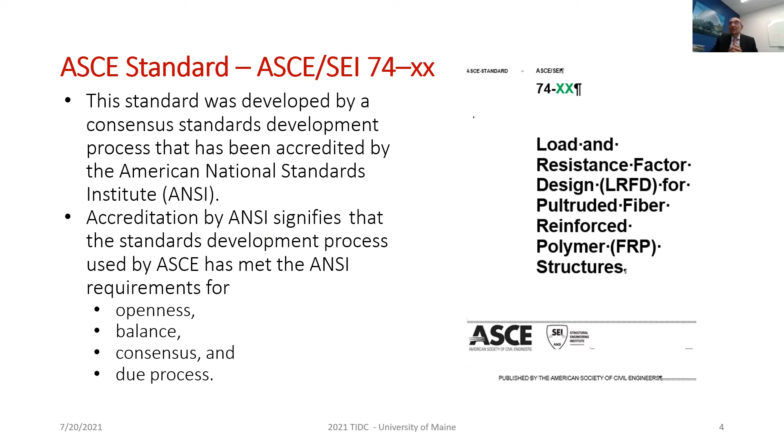There are challenges in the design of pultruded FRP composites due to the anisotropic or orthotropic nature of the material, which makes the job of design difficult but allows innovation. Creep and creep rupture of material is a characteristic of pultruded FRP composites, which is not present in many isotropic homogeneous materials such as steel or concrete.

When it comes to durability, although pultruded FRP is not susceptible to corrosion the way steel is, it does lose strength to some extent, and modulus, with exposure to different environments. This is essentially taken into account by looking at the retained properties.

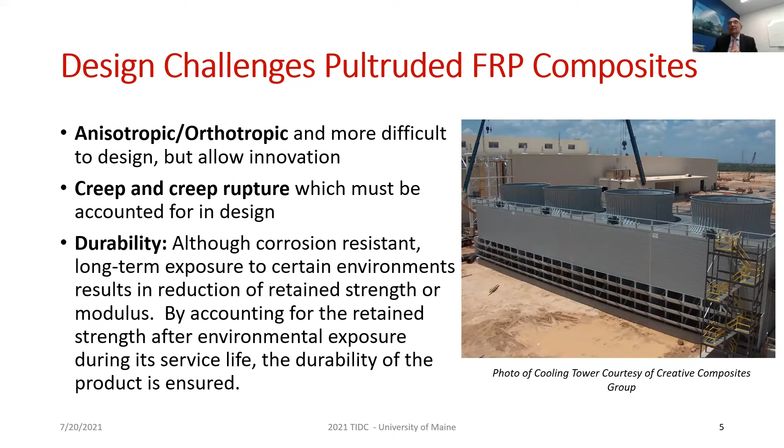The goal of the design is to use this material in new buildings, new bridges, and other structures constructed with pultruded FRP, assist in design of connections, as well as construction of prefabricated building components, industrial buildings, especially those subjected to very harsh corrosive environments such as seawater, and structures that can withstand earthquakes because this material has extremely high strength to weight ratio.

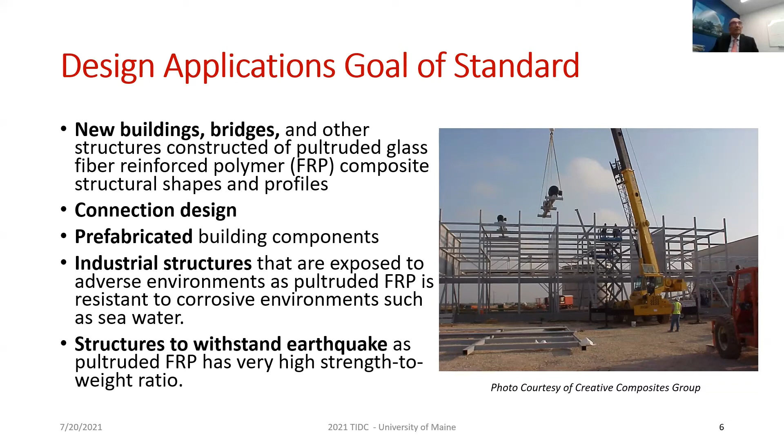The content of this standard includes 9 mandatory chapters with mandatory requirements and 9 chapters of commentary, which are not mandatory, plus 2 chapters, one on glossary and the other on symbols.

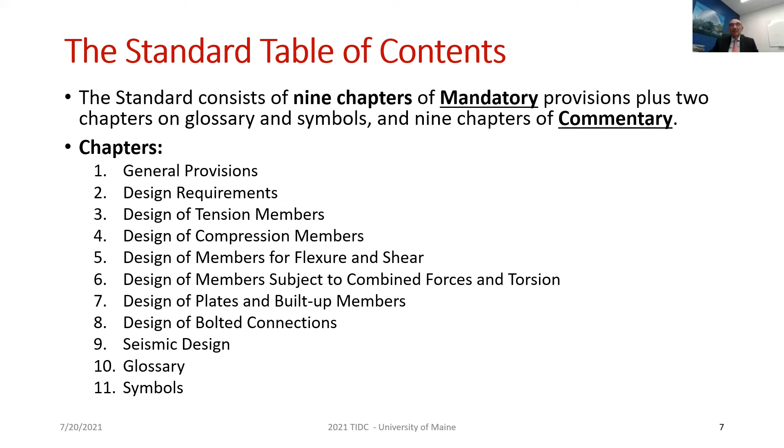The chapters cover general provisions, design requirements, as well as design of members for tension, compression, flexure, and shear, and combinations of forces and moments and torsion applied to individual members, as well as design of plates and built-up members and bolted connections. There is a chapter also devoted to seismic design, in addition to glossary and symbols chapters.

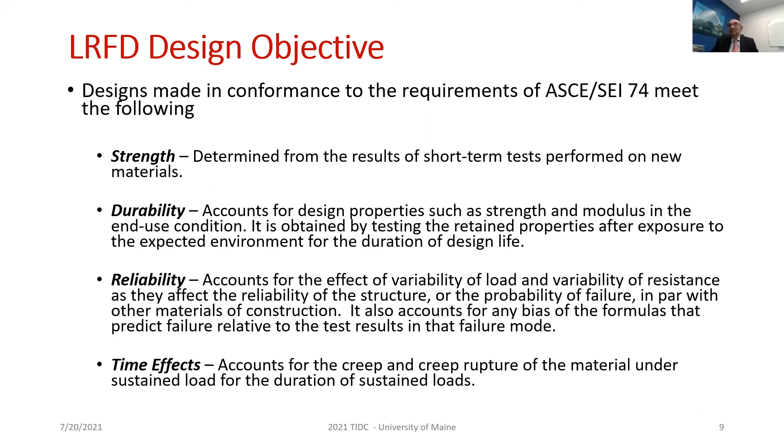What is the design philosophy of this standard? The goal was to develop a standard that, following it, would result in structures that provide the necessary strength, durability, and reliability on par with other materials of construction, and that account for time effects from creep and creep rupture of material under sustained loading.

Let's look at it in an equation. If R sub U is the required strength when the structure is subjected to factored load combinations, then this required strength should be less than or equal to the capacity. But how do we define the capacity?

The capacity is the product of three terms: one is the time effect factor that accounts for creep and creep rupture, the resistance factor that accounts for variability of resistance and bias, and the nominal strength in the end use condition.

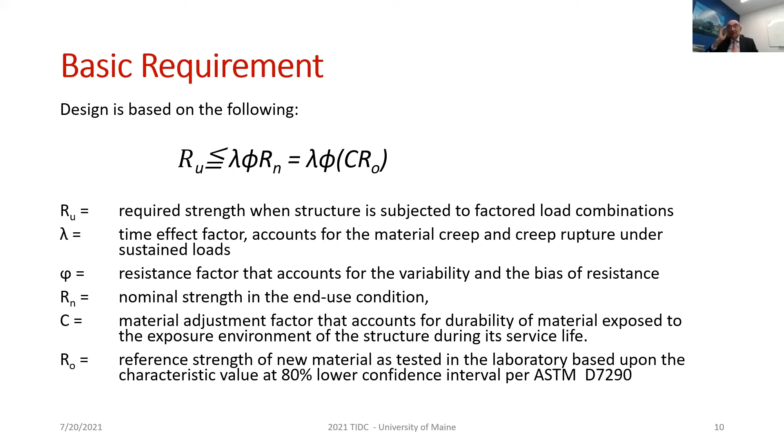If we consider the meaning of strength in the end use condition, we can express it as a reference strength, R sub naught, which is the strength of the new material as tested in the laboratory, and a coefficient, which is a knockdown factor or material adjustment factor, that accounts for the exposure environment the structure is subjected to during its service life.

Let's look at each component. Loads, load factors, and load combinations - where do they come from? These are essentially the same regardless of material of construction, and they are specified in ASCE 7, the document entitled Minimum Design Loads and Associated Criteria for Buildings and Other Structures.

Many different load combinations are given, with load factors associated with each load and each load combination. For example, dead load and live load on a building are treated with load factors of 1.2 for dead load and 1.6 for live load. These factors and loads are the same regardless of the material of construction.

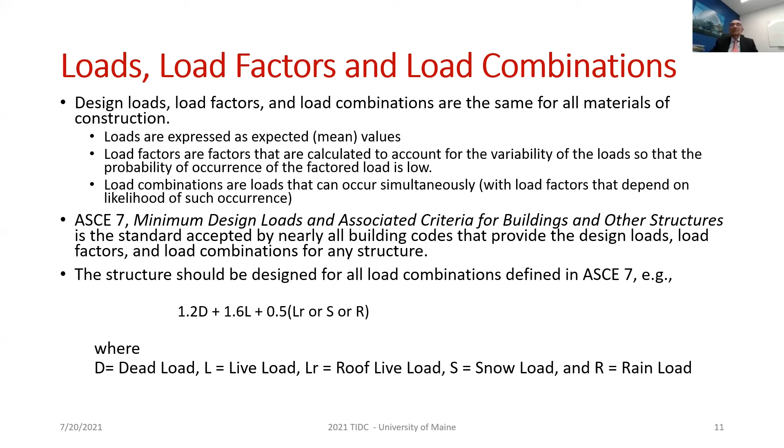Strength is defined with reference strength, which is new material as tested in the laboratory following ASTM standards. But what do we do with the test results once we obtain them? Here is what we rely on: an ASTM standard that says we look at the reference strength as the 5th percentile value of the test results with 80% confidence.

Confidence has to do with the size of the sample being tested. Once you have the reference strength, the nominal strength is the strength in the end-use condition. As I said before, it's the product of the material adjustment factor that accounts for durability and the reference strength.

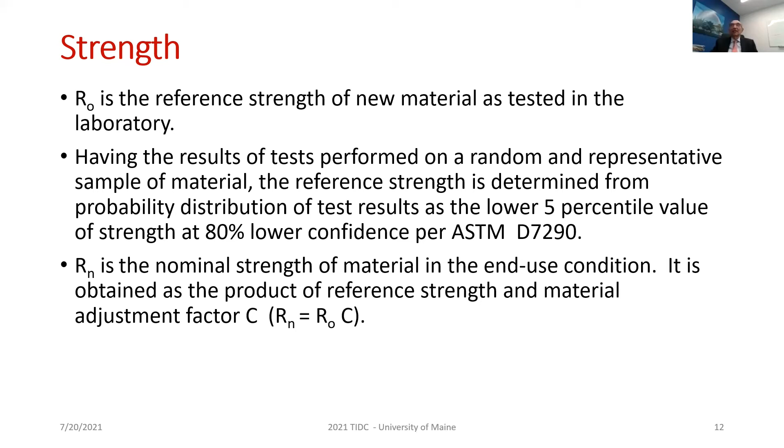How do we get the material adjustment factor, which is the basis of durability? We expose the material to different environments for a long period of time, between 1,000 and 10,000 hours. After exposure, we measure properties such as strength or modulus, take the mean of that, and compare it with the mean of the new material that has not been exposed. Then we extrapolate the results to the expected life of the structure.

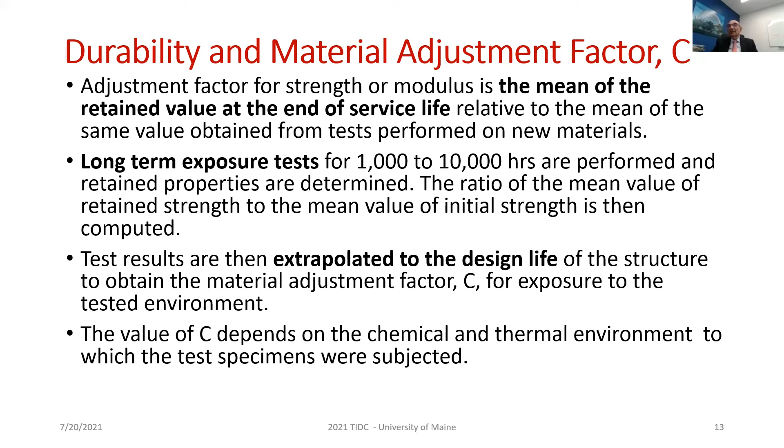This way we establish the factor C, from which the nominal strength is calculated using the reference strength. The standard provides for two exposures: moisture and temperature, with values that vary for strength and modulus, and also vary with the type of resin. In the case of temperature, it also varies with the level of temperature. These values, if you have both moisture and temperature, have to be multiplied together to establish the material adjustment factor for a product exposed to both.

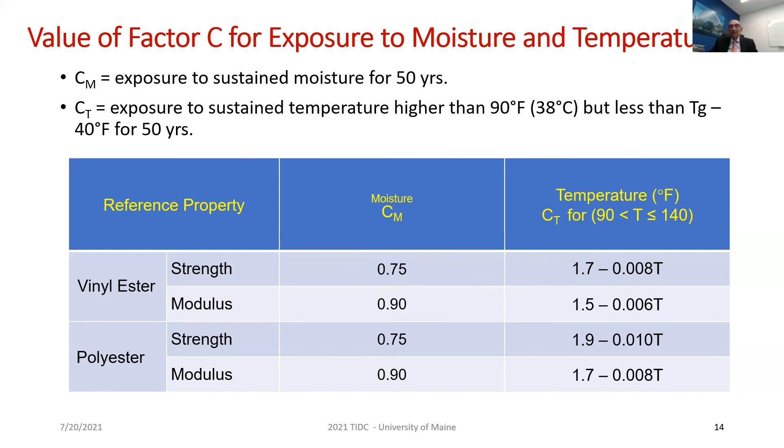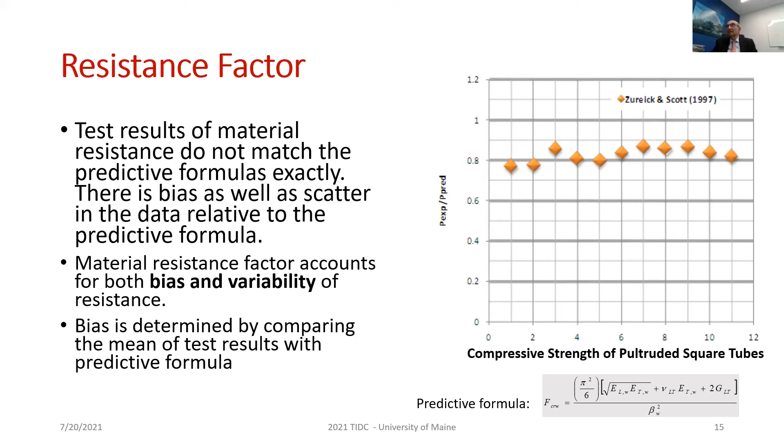Resistance factor is another factor that we talked about, and it comes into the capacity. The resistance factor accounts for bias and variability of resistance. What is bias? I present to you the compressive strength of pultruded square tubes, and you will see that using the best equation that money can buy, still the test results coalesce around 80% of the predicted value.

Therefore, there is a bias of 0.8 that has to be accounted for. And what about variability? Variability goes back to probability of failure or probability of survival. How many standard deviations do we have to go below the mean in order to have the reliability, or probability of failure, which we desire the structure to have? That number is called the reliability index.

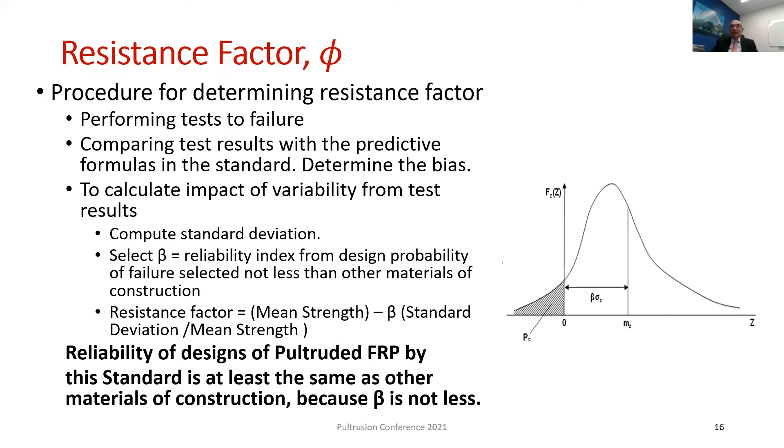Two structures made of completely different materials, so long as they have the same reliability index, have the same performance and the same reliability. This is the basis why we can claim that structures designed in accordance with this standard are, from a standpoint of reliability, on par with other materials of construction, because we selected the reliability index very similar to those used in other materials of construction.

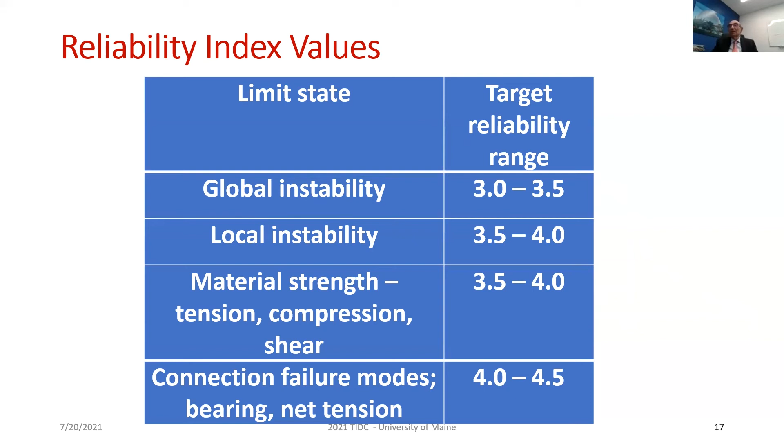It's variable. For example, general instability is between 3 and 3.5. As you get to local instability, which you don't want to occur at the same time as general instability, you put it further away, at 3.5 to 4, until something you don't want to fail at all, such as a connection, which you assign a higher reliability index.

Time effect factor is done essentially by subjecting the member, component, or structure to a load which is less than its strength and measuring time to failure. Then we extrapolate the results to the design life of the structure, and based on that, we get a factor, a knockdown factor on strength.

For example, for permanent load using pultruded FRP, you have a factor of 0.4 reduction due to permanent load effect. However, since load combinations combine different loads, some may be instantaneous like wind and earthquake, some may be permanent like dead load, and some may be in between like live load.

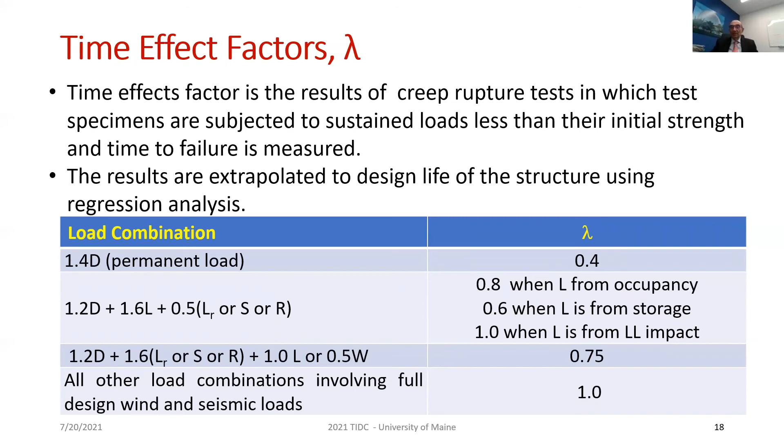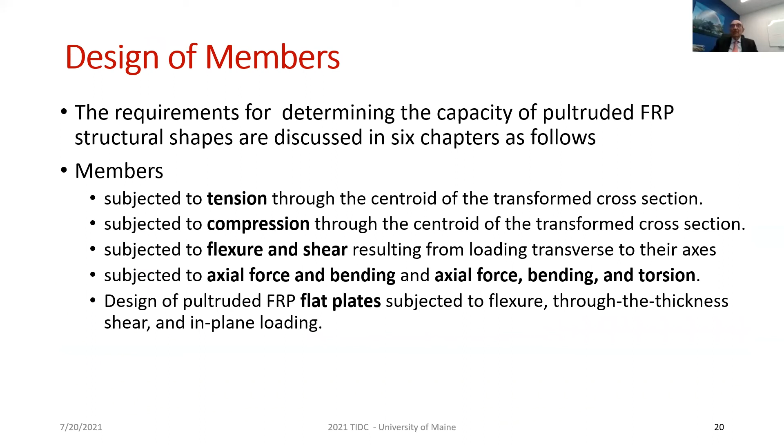These combinations have a much higher time effect factor, as you see in this table, which is an extraction from the standard. Design of the members: there are chapters devoted to design of members in tension, compression, flexure, shear, axial force and bending, axial force bending and torsion, and flat plates. We will not go through all of them, but I'll take one as an example, and that's compression members.

In the case of compression members, we look at different modes of failure. For example, rupture of the member in compression, general buckling of the member - here the issue of imperfection comes into play - and local buckling of the flanges and webs and slenderness ratio. All of these are sensitive subjects that influence the strength and are well discussed in this chapter.

Each one of these failure modes is associated with equations that manifest the behavior of a member, and there are different shapes and different members, so you can imagine this can be quite an extensive chapter.

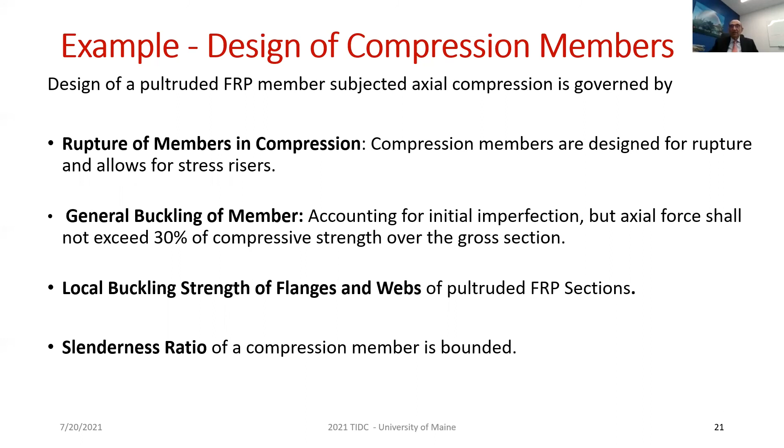Design of connection is an important chapter. We look at a single bolt and what are the failure modes of a single bolt, and then we generate the capacity by looking at all possible modes and selecting the one that governs, or with the least amount of capacity.

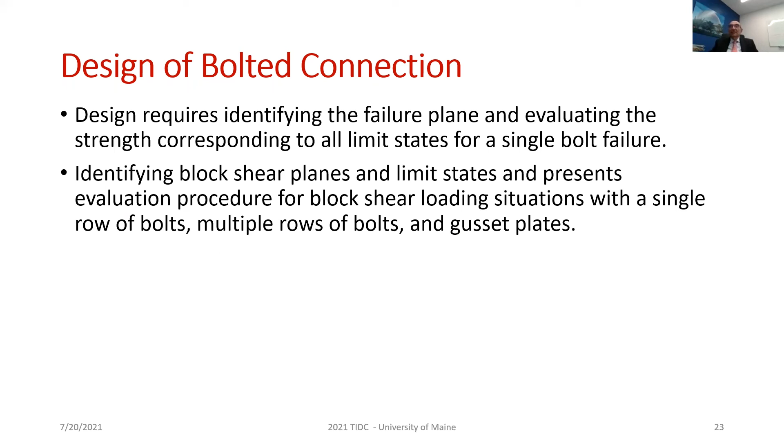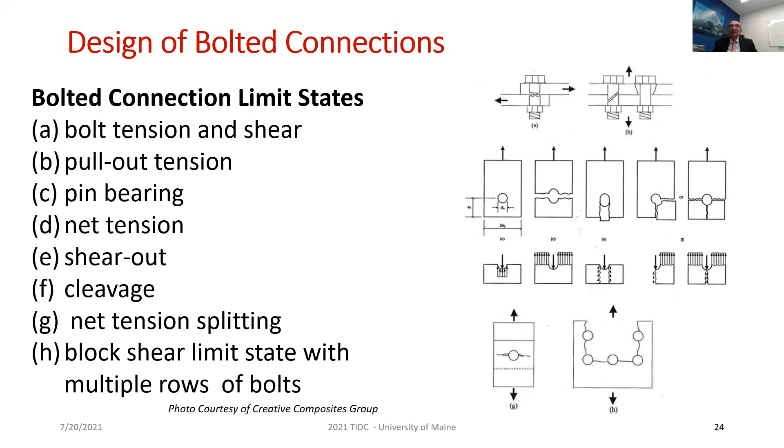The single bolt connection can fail in pull-out tension, pin bearing, net tension, shear out, and cleavage and net tension splitting, which are depicted in the figure on the right-hand side, as well as, if there are multiple bolts, you get block shear, which requires you to prescribe the failure perimeter or failure mode, and based on that, you can calculate the strength associated with it.

Seismic design: it was necessary to develop a chapter on seismic design. One reason was for completeness, and the second is that the product has a very fantastic high strength to weight ratio, and it's ideal for application to

excitations from ground motion. The earthquake load is defined in the same way as for any other structure, in accordance with the requirements of ASCE 7. The standard also meets general structural integrity provisions of ASCE 7 when you design pultruded in accordance with the requirements of this chapter. To resist lateral seismic loads, pultruded FRPs are required to have braces at this time.

Maybe in the future, with enough testing, other connections may become acceptable, but at this time, for the confidence we want designers to have, we require that any lateral resistance is provided by bracing. We are providing initial seismic design parameters, but these parameters are subject to change in the future as testing progresses, and these seismic parameters have to go into building codes and other standards.

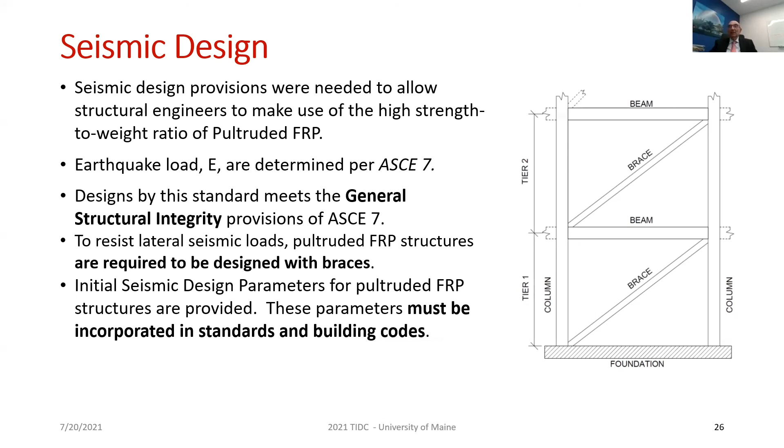In conclusion, I can say that this new standard will enable structural engineers and architects to create and safely design new buildings, new bridges, prefabricated components, and structural systems, and artworks that are easy to construct and have high strength and lightweight, and can resist adverse environments, and are not subject to corrosion as other structural materials are.

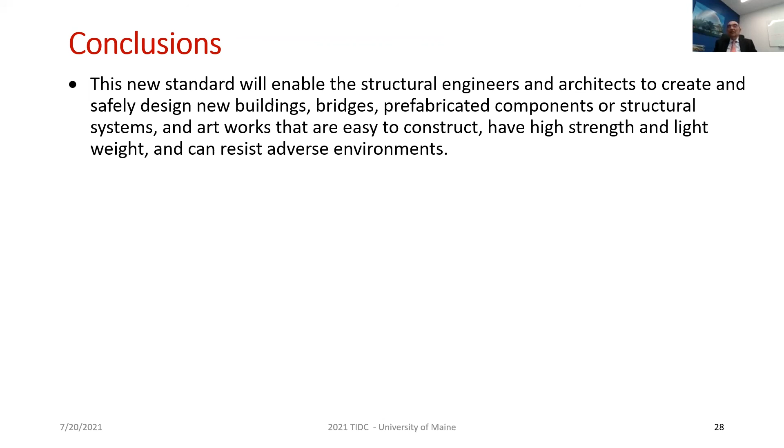Anyway, that terminates my talk, and later on I will be responding to any questions that you may have.